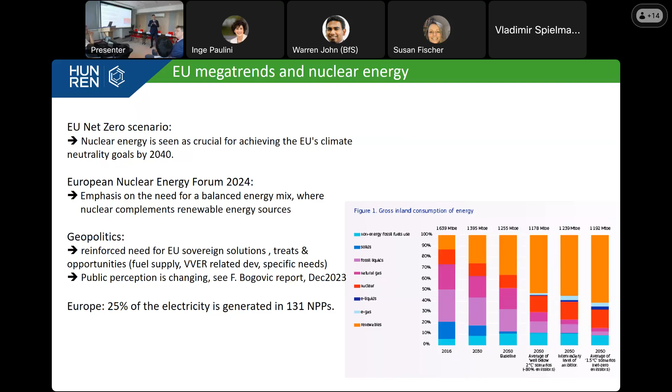So this is the geopolitical and energy market survey of the present problems. And after that, I would also tell you that in Europe since 2007 this so-called Sustainable Nuclear Energy Technology Platform exists, which is a body organizing the research and giving us the main directions.

This platform, of course, consists of the researchers themselves from the academic universities, and as it is a technology platform, it also invited the industrial users and the policymakers as well. This technology platform concept also exists in other energy areas and industrial sectors. But in nuclear, it's also a very good vehicle to draw the future directions of nuclear research.

So what we see is that if we would like to transform our energy system in this fossil-free direction by 2050, then we need more nuclear. Presently, we have around 25%. This doesn't look like too much, and so in the future we have to deal not only with the present generation of reactors and the present technology, but we have to think about the other questions as well.

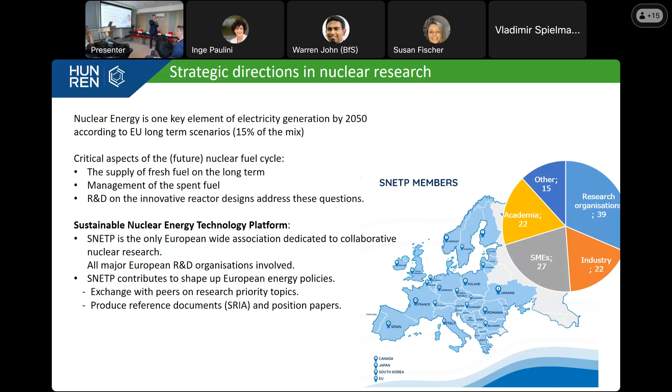And the innovative reactor designs, which serve us to provide this technology, we have to deal with them. Presently in Europe we have only very few projects, and we don't see the industrial interest behind it. This is the problem. So the Sustainable Nuclear Energy Technology Platform is organizing the research and describing the main directions. And what is the strategic research agenda now? This is a very general form, let's say, so it is not very surprising.

This graph shows you the age distribution of the present fleet of reactors, so it also gives you a picture that we have quite an old fleet, above 40 years. So one of the urgent questions is how to operate them longer. On the long term we have to change them for maybe a new technology. So of course the safe operation of the present fleet is the number one topic, because we have a fleet already.

The fuel supply, as I mentioned, is partly because of this future question of the uranium, but also reflecting on the recent accident in Fukushima. We also speak about the new tendency in the accident tolerant fuel direction, and the sovereignty question of the Russian origin, that we would like to replace the Russian fuel with something else, and this also implicates some technology questions.

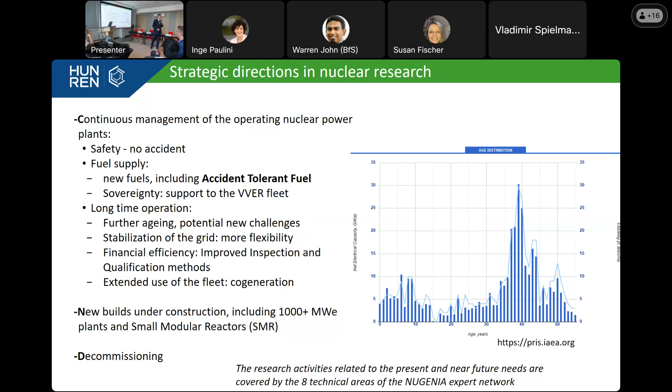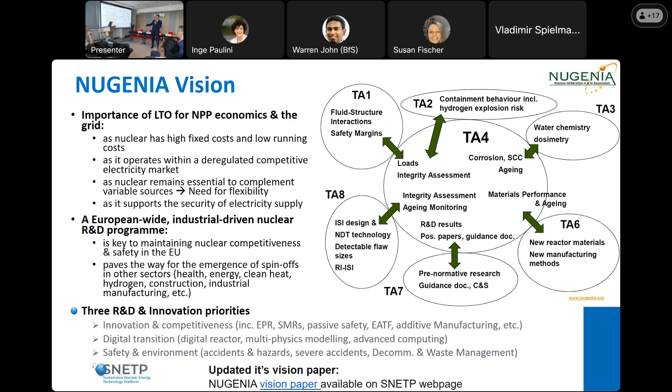Decommissioning, of course, will come into the picture. This is maybe not urgent, but a very important part of the picture. I don't want to go into detail, but all this you can find in the so-called NUGENIA vision paper. NUGENIA has 8 working groups, and they deal with the different technological aspects. Maybe for this group in the room it's not very important to look at all this, because radiation protection is not very well mentioned here, but of course radiation protection is behind all those topics. So I don't want to go into detail. There are also some slides in my presentation I would like to introduce, but maybe we can share them later so you can look at them.

This is just an example that even nuclear is considered an old technology. I don't agree with that, but sometimes we hear it. We can also show the public that we have continuous innovation in this technology, in this industry. Even with the existing nuclear fleet, we think about continuous innovation. This is an example: when we investigate the pressure vessel, which is getting old and more damaged by neutron radiation, the research community in Europe innovated a new method which helps us reuse those steel surveillance samples used for monitoring the aging of the pressure vessel.

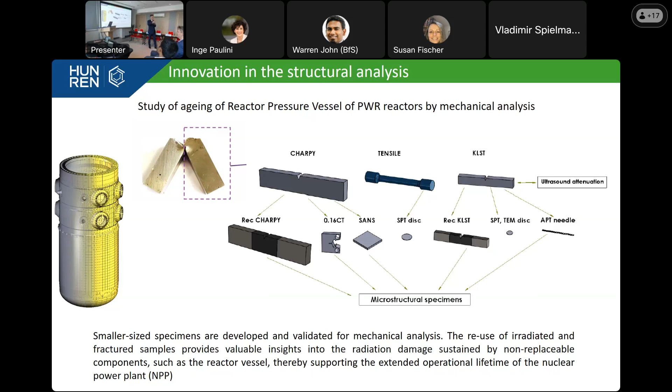The problem is that at the beginning nobody designed this pressure vessel for over 30 or 40 years. So they put a certain number of samples inside the pressure vessel for monitoring the aging. When we decided to extend the lifetime of the pressure vessel and the whole reactor, we faced the challenge of how to monitor it afterwards. We cannot put fresh monitoring material inside an old pressure vessel, because it doesn't give us the real information. So we should reuse the old ones, recycling the old samples. This innovation is about how to recycle and make more data available from the old samples.

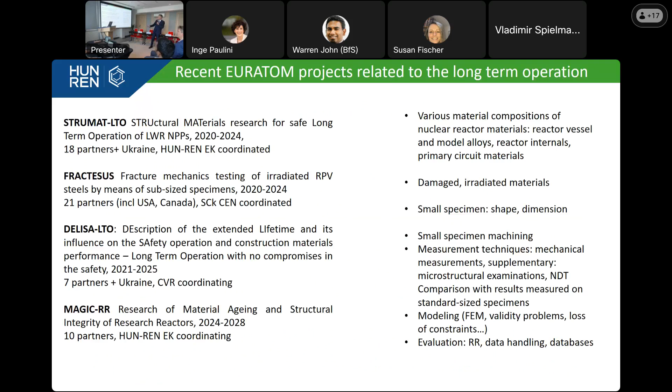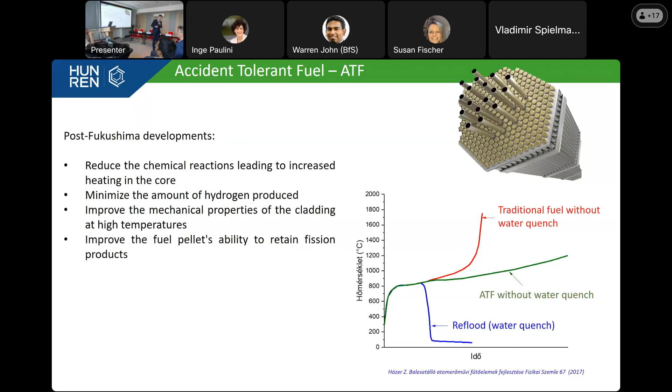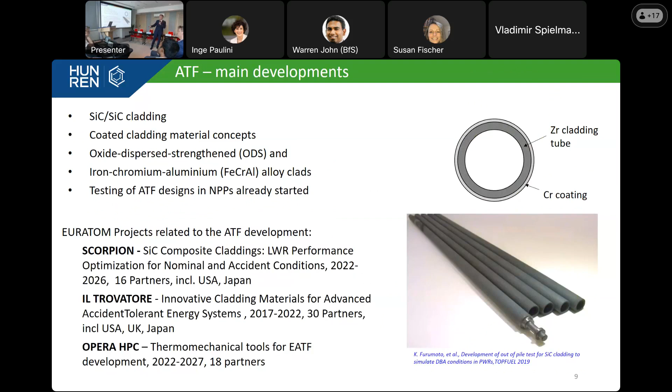I skip these because they are examples of European projects. Some of them we are coordinating, this one and the last one, for example. This other example is about innovation in nuclear fuel material, the so-called accident-tolerant fuel. It's an outcome of the Generation 4 reactor developments, but we can probably use it in the present fleet of reactors. This concept offers a possibility to even increase the temperature of a nuclear reactor, and during an accident it won't produce hydrogen. So this is an important barrier, and the radioactive material cannot be released. There are numerous material science and material testing projects behind it.

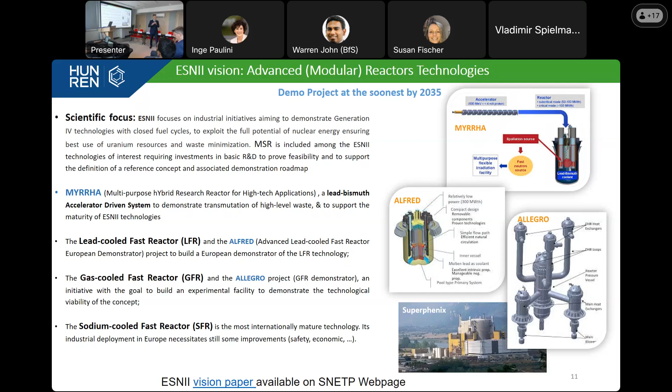Just one comment on Generation 4 reactors. Europe is still running MYRRHA and other projects like ALFRED and ALLEGRO, which aim at using nuclear fuel in a much more efficient way and going to higher temperatures. So the Generation 4 concept is still living, however we don't see much effort behind it; industry is still not very interested, but for research it is excellent. One example is ALLEGRO, which we are also involved in. This is a Visegrad collaboration. We founded the V4G4 collaboration together with the Slovak colleagues, UJV from the Czech Republic, our institute, and the Polish nuclear institute.

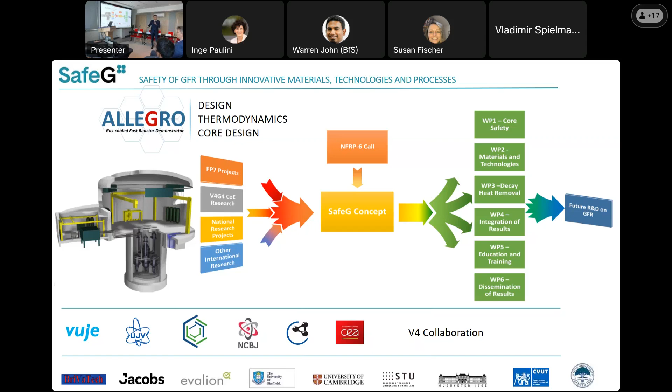NC2I is about the so-called co-generation I mentioned to you, so I don't want to go in detail, but this is an important part of this SNETP vision of using nuclear reactors not only for electricity but also in the heat market.

And let me just mention on one slide that of course besides the fission technology we also speak about fusion, nuclear fusion. Although it's still science fiction at the moment, so it is at the conceptual and even the laboratory experiment level, there are also concepts of how to create the first demonstrator power plant, which will probably also produce electricity from fusion energy. So this is a European concept.

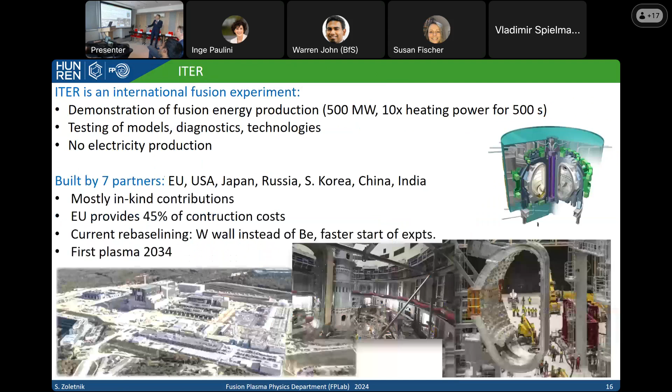But you all know about the ITER experiment. It's still an experiment, so it is not a power plant. It won't produce any electricity, only physics. And they would like to build up this machine to test the different technology components for fusion. This community is very strong and also part of the European landscape, and they get much more money anyway than the fission technology. So I won't go in detail because it's not the focal point of my presentation.

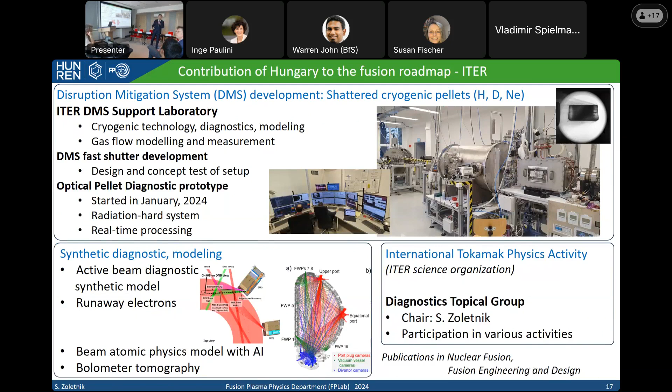This is a picture of our laboratory. So in our institute we also have a strong group dealing with one of the technologies. This is a kind of emergency stopping system which can stop the fusion reaction in a very short time. So this laboratory has been built recently in our research institute, and we are very proud of it.

And just reminding you that in Hungary you can find one existing nuclear plant with 4 units. It was made in the early 80s, and they are already extended for the next 10 years from now. And we are speaking about another extension of the license for another 20 years because we don't have enough energy production anyway. So we are also planning to build new reactors, 2 Russian VVER-1200, but at the moment it's absolutely uncertain what will happen with them. So the government decided to further extend the existing fleet.

So Paks II is the new project, and we will see how it goes on. They got the construction license in 2022, but at the moment it is not going very quickly, let's say. SMR, we are also studying the possibility to build SMRs in Hungary, and at the moment it's just at that level of interest, so there is no concrete movement behind it.

We have the Budapest research reactor and a small training reactor at the technical university here at the bottom of the line. So the Budapest research reactor is mainly used for neutron physics research. So this is the main purpose of that.

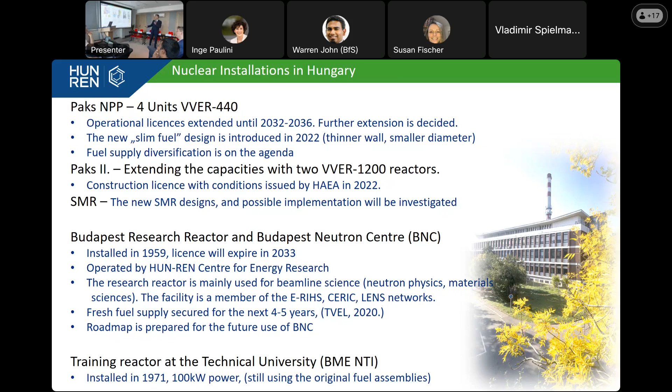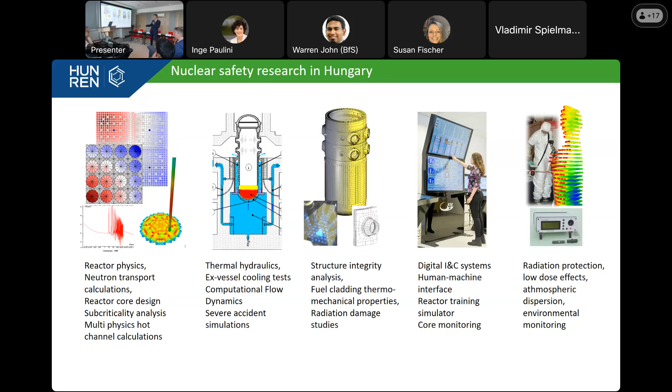And just a quick overview of the nuclear safety research that we do in our institute. I can also say that this is valid for the whole Hungarian nuclear community. So from the basics of reactor physics up to the large-scale experiments, radiation protection is also in the picture. So we have a strong competence, I guess, in radiation protection, and we also have some kind of activity in I&C; the man-machine technology is important for the nuclear power plant as well.

So what we see in the big picture, just summarizing and concluding, is that from now on we would like to operate the existing fleet, and we have a lot of challenges around them, and we would prepare for using nuclear reactors in the long run, but we have to solve the question of the fresh fuel and also the spent fuel management. And what is important is that the continuity between the two necessitates a strong policy behind it, and I think it was lacking in recent years, but we hope that it will change in a positive way.